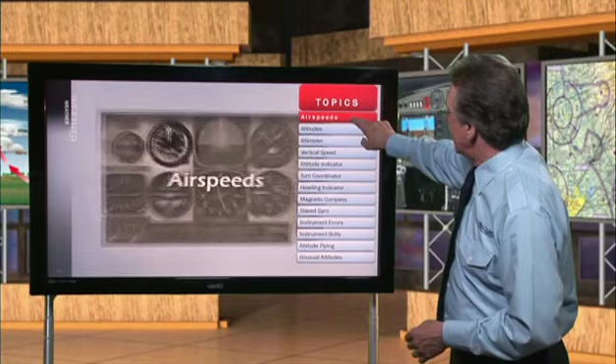We'll cover these topics: airspeeds, altitudes, altimeter, vertical speed, attitude indicator, turn coordinator, heading indicator, magnetic compass, slave gyro, instrument errors, instrument skills, attitude flying, and unusual attitudes. Okay, let's move into the classroom with our first topic, airspeeds. Join your instructor now.

Hi, I'm Robert Bremer, your instructor for this lesson on flight instruments. Flight instruments are the key component of IFR flight. In fact, flight in IMC would be impossible without these instruments. The first instrument we'll discuss is the airspeed indicator. It's part of the pitot-static system, which we'll discuss in greater detail later.

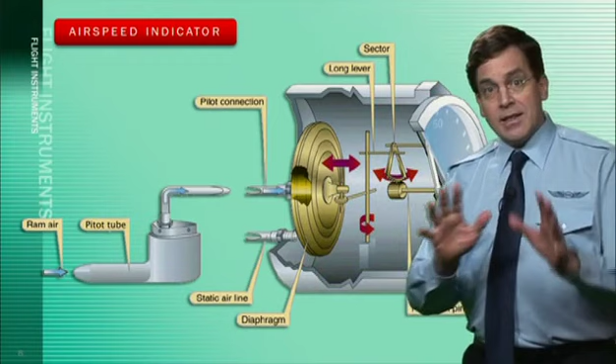Here we have a simplified diagram of the pitot-static system to which the airspeed indicator is connected. The airspeed indicator is connected directly to the pitot tube. So let's take a look at the inner workings of an airspeed indicator. The ram air enters the pitot tube and pressurizes this diaphragm. The diaphragm drives the airspeed indicator hands through a mechanical coupling consisting of a long lever and this sector gear.

So let's take a look at some common types of airspeed indicators found in general aviation airplanes. First is a true airspeed indicator, like the one you see here. A true airspeed indicator allows the pilot to correct indicated airspeed for non-standard temperature and pressure. Next is a maximum allowable airspeed indicator with a movable pointer indicating the never-exceed speed, which changes with altitude. And finally, we have a Mach meter, which shows the ratio of the speed of sound to the true airspeed the aircraft is flying.

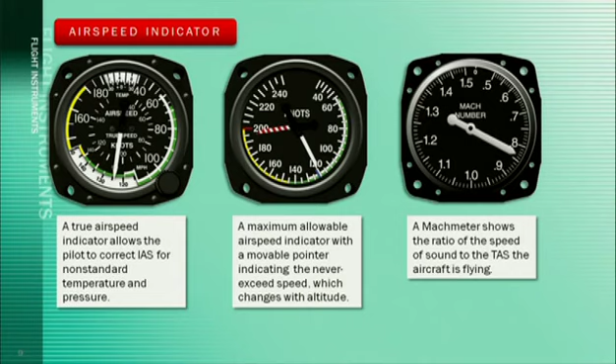So let's take a look at some definitions of a typical airspeed indicator. We'll take a closer look at the color coding. You'll notice there's a series of color-coded arcs on the airspeed indicator: a white arc, green, yellow, and then this red line right here. These are airspeed limitation ranges or operating limits of your airplane. Depending upon what airplane you fly, the arcs may shift to different airspeeds, but you'll see these colored arcs on each and every airplane you fly.

Indicated airspeed is that speed read directly from the airspeed indicator. Now, airspeed that is corrected for installation and instrument error is called calibrated airspeed. True airspeed is calibrated airspeed corrected for variations in temperature and pressure. And finally, the Mach number is that ratio of true airspeed to the speed of sound. Let's study airspeed limitations: the white arc, which you see right here, represents the flap operating range.

At the bottom of the white arc, or at the lower speed, is the airspeed limitation called VSO. The V stands for velocity, or speed, and the S stands for stalling, and the O stands for a certain configuration. In this case, that configuration is the lowest possible airspeed you can have with the flaps and landing gear down, or in the landing configuration. Below this airspeed, in the landing configuration, the airplane will stall.

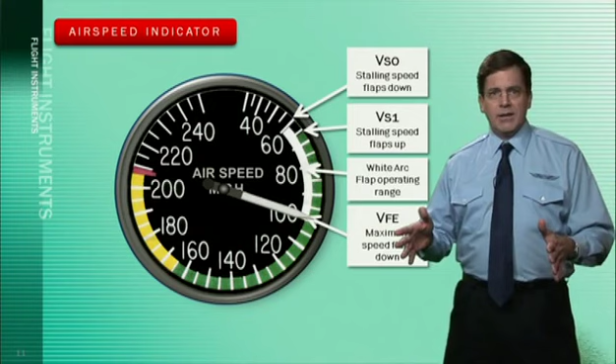We also have this green arc, and the green arc represents the normal operating range. At the top of the green arc, at the higher end, we have VNO, and this is really the highest airspeed you should fly under most operating parameters. You can, from time to time, fly into the yellow arc if the air is very smooth. But just like a street light, remember, yellow means caution. If the air is bumpy, you want to reduce your speed to fly in the green arc.

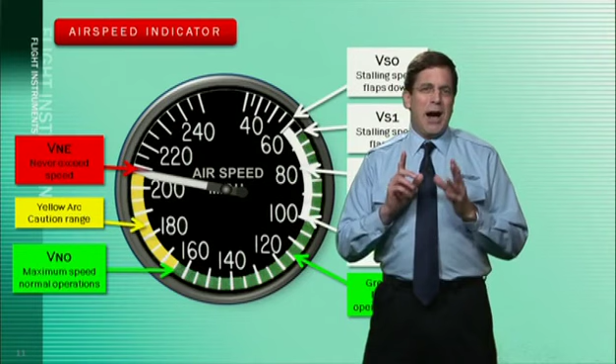Now, like we were saying, the yellow arc represents caution. Operating in this range requires caution, and as mentioned earlier, you should only fly at these speeds in smooth air. At the very top of the yellow arc is the red line, right here. This is VNE: V for velocity, N for never, and E for exceed. Never exceed speeds above this red line can be very dangerous. If you fly above this speed, you risk the likelihood of structural damage to the airplane.

There are also some airspeed limitations that are not marked on the airspeed indicator, but you need to know them just the same.

VA is maneuvering speed. Maneuvering speed is that speed at which you may move the flight controls to their maximum fore and aft deflection and not produce any structural damage to the airplane. VA, or maneuvering speed, can be found in the pilot's operating handbook for the particular airplane that you're flying.

Another airspeed limitation not depicted on the airspeed indicator is VLE. VLE is the maximum landing gear extension speed. This is the maximum speed at which you can safely lower the landing gear if you have aircraft with retractable landing gear. Again, this speed is found in the pilot's operating handbook.

Now, next is VX speed. VX is the best angle of climb speed. And VY is the best rate of climb speed.

Let's take a look at an example. Now here our airplane is rolling for departure, but you'll notice there's a group of trees at the end of the runway. If you have an obstruction at the end of the runway, you need to make sure you can climb out at VX, the best angle of climb speed. This airspeed allows the airplane to gain the greatest amount of altitude in a given distance.

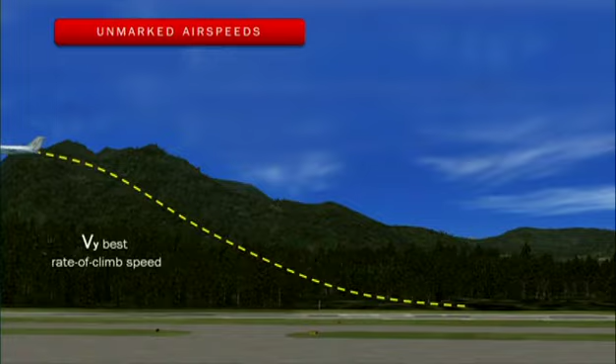And we're at altitudes. Back into your classroom to join your instructor. Our flight altitudes are an important aspect in both VFR and IFR operation. Aviators define altitudes based on a number of factors determined by both physical properties and regulations. In this section, we'll study types of altitudes.

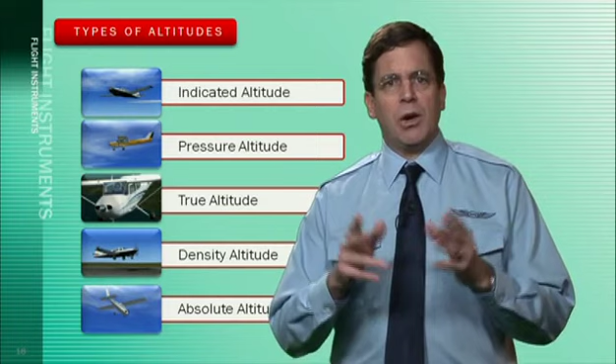Let's talk about the various types of altitudes. Now here's an overview of the various altitudes you need to know. There is indicated altitude, and then we have pressure altitude, followed by true altitude, density altitude, and finally absolute altitude. Let's cover these in greater detail. We'll start with indicated altitude. Indicated altitude is simply the altitude that's shown on the face of your altimeter.

Remember this: atmospheric pressure decreases an inch for every 1,000 foot altitude increase. So if our altimeter is set to 29.15 inches and a new altimeter setting of 29.85 inches is entered, representing a change of 0.7 of an inch, this equals a change in altitude of 700 feet.

Now here's a review of pressure effects. Suppose we're flying along and our altimeter is set to 29.92 inches. We get a call from the tower, or we talk to FlightWatch, and they say our altimeter setting should be 28.92. That's a decrease of 1 inch of mercury, so we have a change in altitude of 1,000 feet.

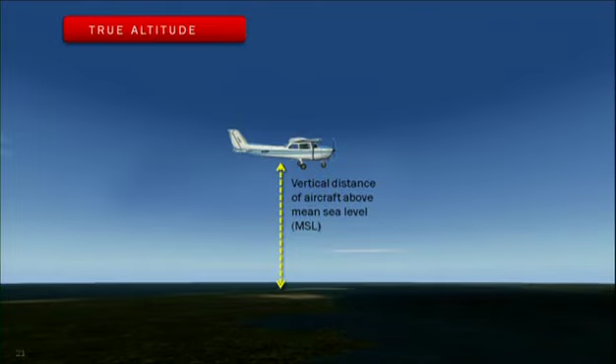Next, let's take a look at true altitude. True altitude is the vertical distance of the airplane above mean sea level, or MSL. Airports, terrain, and obstacle elevations on aeronautical charts are true altitudes.

Density altitude is pressure altitude corrected for non-standard temperature, which is 59 degrees Fahrenheit. Since you'll often be flying in non-standard conditions, you need to know and understand density altitude and how it affects your airplane's performance.

Absolute altitude is the vertical distance of your airplane above ground level, or AGL.

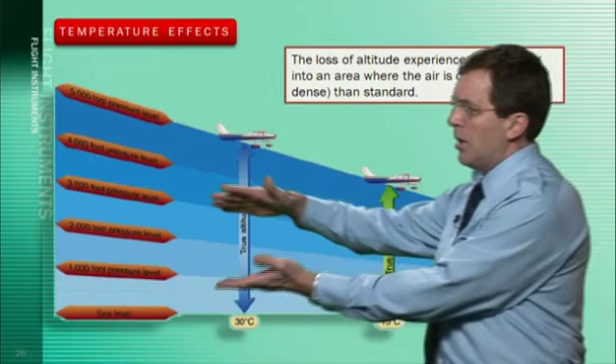When the aircraft is flying in air that is warmer than standard, the air is less dense and the pressure levels are further apart. When the aircraft is flying at an indicated altitude of 5,000 feet, the pressure level for that altitude is higher than it would be in air at standard temperature, and the aircraft is also higher than it would be if the air were cooler. If the air is colder than standard, it is denser, and the pressure levels are closer together. True altitude is higher than indicated altitude whenever the temperature is warmer than ISA.

Now in this example, let's assume we are flying in temperatures outside of ISA parameters. Here we're flying with an indicated altitude of 10,000 feet. The local pressure remains at the standard condition of 29.92 inches. We're flying in warmer than standard air. Because the air is less dense and the pressure levels are further apart, the altimeter reads 10,000 feet, but the true altitude is 11,000 feet.

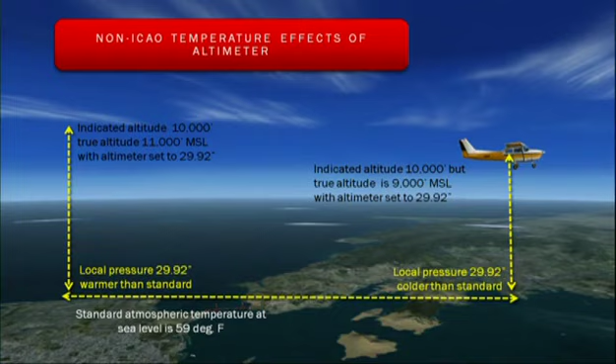Next, we fly into an area where the temperature is colder than standard. Because the air is denser and the pressure levels are closer together, the altimeter reads 10,000 feet, but the true altitude is 9,000 feet. Now we have a table to look at.

This table that you see here is derived from International Civil Aviation Organization, or ICAO, data. The cold temperature-induced altimeter error may be significant when considering obstacle clearances when temperatures are well below standard. You may want to increase your minimum terrain clearance altitudes, with a corresponding increase in ceiling from the normal minimum, when flying in extreme cold temperature conditions.

Now, if compensation is applied, ATC must be informed that the aircraft is not flying the assigned altitude. Otherwise, vertical separation from other aircraft could be reduced, creating a potentially very hazardous situation.

Under extremely cold conditions, pilots may need to add an appropriate temperature correction, determined from the chart, to charted IFR altitudes to ensure terrain and obstacle clearance, with the following restrictions: altitudes specifically assigned by Air Traffic Control, or ATC, such as maintain 5,000 feet, shall not be corrected.

Contact 5 miles east of McMinnville, Portland, altimeter 3019er. 3019er, thank you, 9 Golf Romeo. Welcome, verify your altitude again please. We're just coming up on 4,000, 9 Golf Romeo.

Thank you. Assigned altitudes may be rejected if the pilot decides that low temperatures pose a risk of inadequate terrain or obstacle clearance. As a pilot, you must advise ATC of any applied corrections.

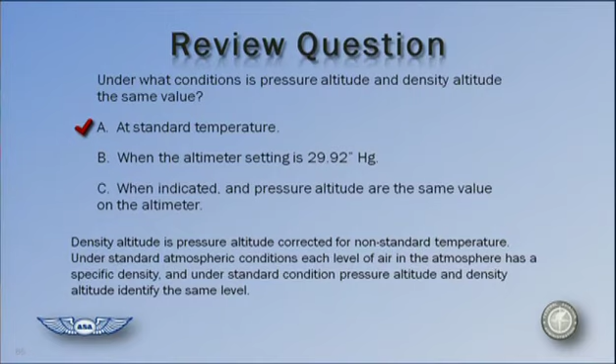Your answer, of course, is A. Density altitude is pressure altitude corrected for non-standard temperature. Under standard atmospheric conditions, each level of air in the atmosphere has a specific density, and under standard condition, pressure altitude and density altitude identify the same level.

Okay, let's take that second question. Under what condition will true altitude be lower than indicated altitude with an altimeter setting of 29.92 inches of mercury? Which of these, A, B, or C?

The correct answer here is B, in colder than standard air temperature. Effects of non-standard conditions can result in a difference of as much as 2,000 feet between true and indicated altitude on a cold day. So there you have it.

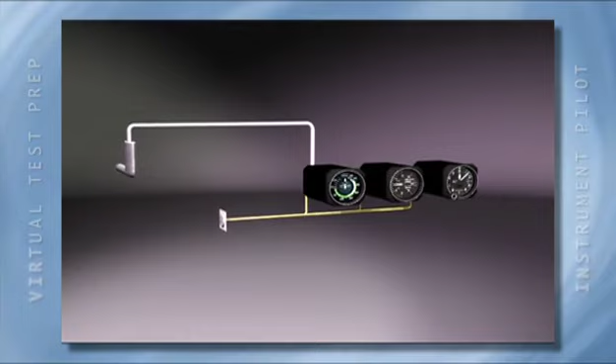The altimeter is part of the pitot-static system. The altimeter shows your height above mean sea level. There are a number of hands on the altimeter, which we'll explain in a moment. Here's an inside view of the altimeter.

The static port, which we see right over here, provides ambient pressure, or the static pressure next to the airplane, for the altimeter. Right here, the aneroid acts like a bellows. It's mechanically coupled to the altimeter pointers.

The pointers generally contain a 100, 1,000, and 10,000 foot hand, and there's a barometric scale adjustment knob which adjusts the altimeter setting in the Kollsman window. The crosshatch flag that you see right down here warns the pilot of low altitudes.

Now, here are two typical altimeters, the three-pointer style and the drum-type altimeter. Each provides the same information. The drum-type altimeter is most often found on larger and more complex airplanes.

Let's take a closer look at the altimeter. This little cut right here is called the Kollsman window, and it displays the altimeter setting. For example, if you departed from a controlled airport that has either a tower, ASOS, or ATIS information, you dial the altimeter setting in right here using this little knob.

If you're departing from an airport that does not have these services, you turn the dial to the field elevation from which you are departing. This will give you a fairly accurate barometric pressure indication.

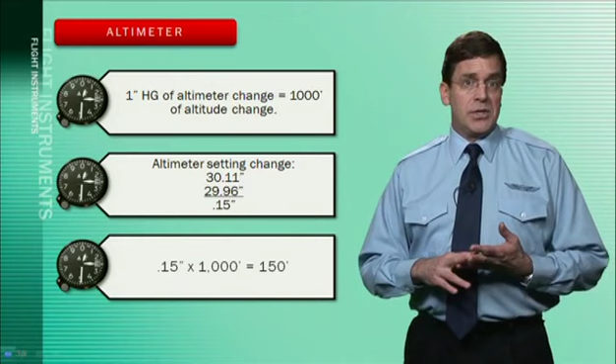Now, check out this graphic. Remember, 1 inch of altimeter change equals 1,000 feet of altitude change. In this example, the altimeter setting is changed from 30.11 to 29.96, which is a change of 0.15. So the altitude change is 0.15 times 1,000 feet equals 150 feet.

We are extremely pleased to have Steve Casner in the studio with us today. Dr. Casner is a research scientist at NASA Ames Research Center in California. He has an airline transport pilot certificate with type ratings in the Boeing 737 and the Cessna Citation. He is also a Gold Seal certified flight instructor. For the past 15 years, Steve has been involved in researching the way pilots learn to use advanced cockpit systems, such as GPS, moving maps, and autopilots, and how these systems can affect pilot awareness, workload, and the types of errors that pilots make.

Steve, we appreciate you being with us. Oh, thanks. Good to be here.

Now, number one question. Many of today's pilots are transitioning from steam gauge instrumentation to the glass cockpit. How is flight training evolving as a result of that? Well, I think there's two schools of thought here. One school believes we should be teaching pilots to use these systems that we're now seeing in the cockpit and to put their trust in them.

Another school believes we should be teaching those systems in addition to all of the old navigational skills that pilots learned in yesteryear: time, distance, rate calculations, fuel calculations, and whatnot. So depending on your frame of mind, some people believe flight training is getting simpler and some people believe it's getting more complex.

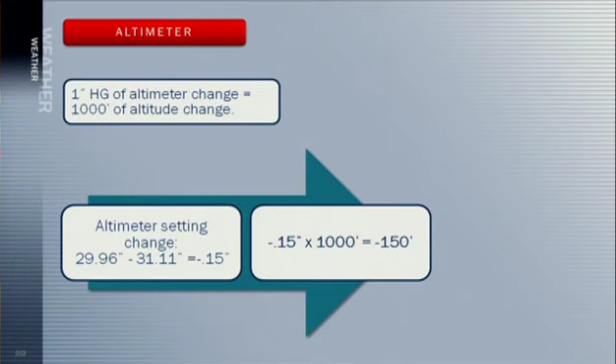Well, in order to get there, we have to do a little math. Given that 1 inch of mercury of altimeter change equals 1,000 feet of altitude change, if we do our math on the altimeter setting change, we take 30.11 inches away from 29.96 inches, we arrive at negative 0.15 inches. We multiply that times our 1,000 feet of altitude change, we get negative 150 feet. We go back to our question, and our correct answer is B: the altimeter will indicate 150 feet lower.

All right, let's move along to the second one. En route at flight level 290, the altimeter is set correctly but not reset to the local altimeter setting of 30.57 inches of mercury during descent. If the field elevation is 650 feet and the altimeter is functioning properly, what is the approximate indication upon landing? Okay, which of these three? I'm going to have to do some more math.

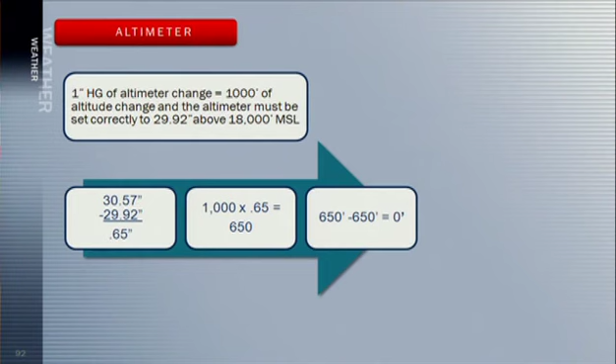Given 1 inch of mercury of altimeter change equals 1,000 feet of altitude change, and given the altimeter must be set correctly to 29.92 inches above 18,000 feet MSL, if we do our math, we take 29.92 inches away from 30.57 inches, we come up with 0.65 inches. Multiply that by 1,000 feet, we get 650 feet. Our field elevation of 650, we take that away from it, so our answer is C, sea level. Given the fact that the altimeter was not set to the field elevation pressure, the altimeter will read sea level or 0 feet.

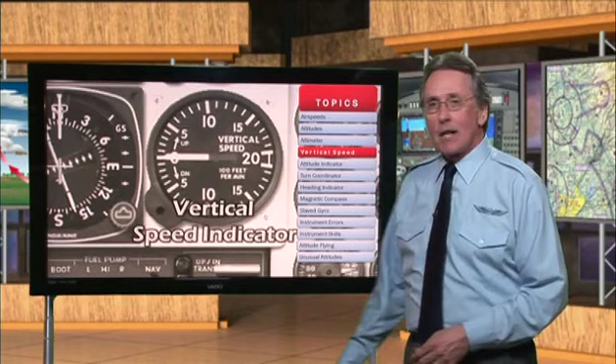Okay, moving on to another topic. Vertical speed is the topic. We'll go back to your classroom and your instructor.

Next up is the VSI, or vertical speed indicator. It's also called a vertical velocity indicator, or VVI, and was formerly known as a rate of climb indicator. It's a rate of pressure change instrument that gives an indication of any deviation from a constant pressure level.

The vertical speed indicator, or VSI, is also part of the pitot-static system. It's connected to the static side of the system. The VSI, formerly known as a rate of climb indicator, is a rate of pressure change instrument that gives an indication of any deviation from a constant pressure level.

The vertical speed indicator measures the rate of climb or descent in hundreds of feet per minute: 500, 1,000, 1,500, or minus 500, minus 1,000, minus 1,500, and so on. Although not required by regulation to be on board, the VSI is commonly found on instrument-equipped airplanes.

To pre-flight the VSI, you would check to make sure that there's a 0 reading prior to takeoff. If it's indicating a climb or descent, you would note the error and apply it to the readings in flight.

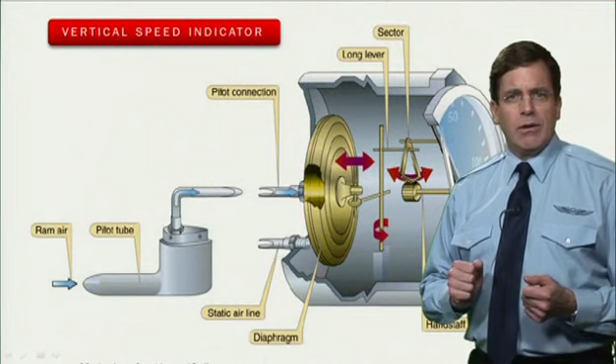The VSI, or rate of climb indicator, is a very sensitive altimeter with a calibrated leak in the case. Inside the instrument case is an aneroid very much like the one you would have in an airspeed indicator. Now, both the inside of this aneroid and the inside of the instrument case are vented to the static system. But the case is vented through a calibrated orifice that causes the pressure inside the case to change more slowly than the pressure inside the aneroid.

It uses the static source as the sensor. As the aircraft ascends, the static pressure decreases. The pressure inside the case compresses the aneroid, moving the pointer upward, showing a climb and indicating the rate of ascent in number of feet per minute, or FPM.

When the aircraft levels off, the pressure no longer changes. The pressure inside the case becomes equal to that inside the aneroid, and the pointer returns to the horizontal or 0 position. When the aircraft descends, the static pressure increases and the aneroid expands. This moves the pointer downward, indicating a descent.

The pointer indication in a VSI lags a few seconds behind the actual change in pressure. However, it's more sensitive than an altimeter, so it's useful in alerting the pilot if an upward or downward trend is going on, thereby helping to maintain a constant altitude.

Welcome back. Let's take on another review question for you. You check the flight instruments while taxiing and find that the vertical speed indicator, or VSI, indicates a descent of 100 feet per minute. In this case, you would take which of these actions, A, B, or C?

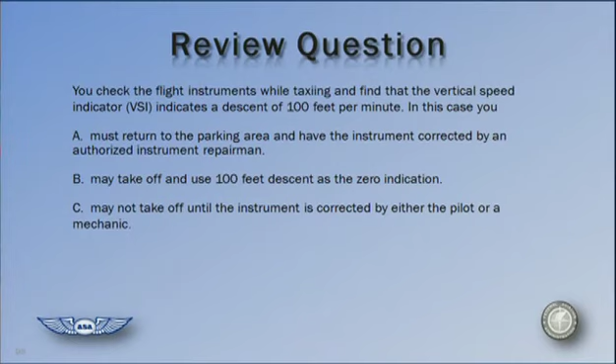And your answer? B. The VSI should indicate 0 plus or minus 100 feet on the ground. Okay, moving along to another topic.

This time out, attitude indicator. We ask you to join your instructor in the class.

Flight without reference to a visible horizon can be safely accomplished by the use of gyroscopic instrument systems and the two characteristics of gyroscopes, which are rigidity and precession. These systems include attitude, heading, and rate instruments along with their power sources. These instruments include the attitude indicator, turn coordinator, and the heading indicator.

A gyroscope, or gyro, is a small wheel with its weight concentrated around the periphery. When this wheel is spun at very high speeds, it becomes rigid and resists tilting or turning in any direction other than around its spin axis.

It takes on a property called rigidity in space. Because of this effect, the gyro does not tip but stays upright. When the gyroscope is mounted inside a gimbal device, that gimbal mechanism is moved around its three axis points. The gyro will still stay rigid.

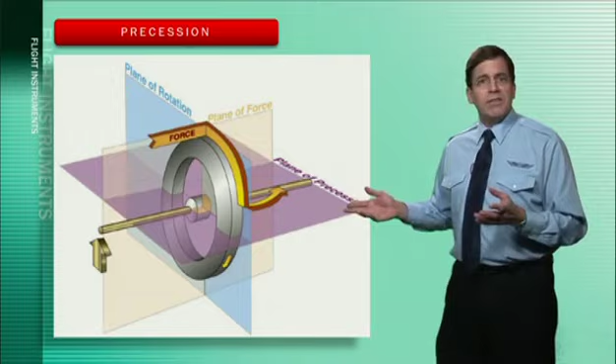Here is a spinning gyro. As force is applied to this point right here with the red dot, the force advances 90 degrees, and that's where it's applied. This causes the gyro to tilt in that direction.

Pneumatic gyros are driven by a jet of air impinging on buckets that are cut into the periphery of the wheel, as shown on this turn and slip indicator. On many aircraft, this stream of air is obtained by evacuating the instrument case with a vacuum source and allowing filtered air to flow into the case through a nozzle to spin the wheel.

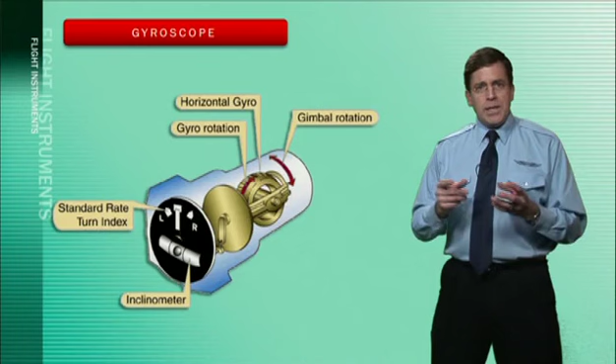The two attitude instruments operate on approximately 4 inches of mercury of suction. The turn and slip indicator, however, only needs 2 inches of mercury, so a pressure reducing needle valve is used to decrease the suction. Air flows into the instruments through filters built into the instrument cases. Now in this system here, we have a problem: ice can clog the Venturi tube and stop the instruments when they're most needed.

So here's a typical vacuum pump system. This vacuum pump pulls air into and out of the gyro instruments, and is driven by the engine of the airplane. The air is pulled through a filter, comes out of the filter, and moves into the heading and attitude indicators. The air flows through the instruments and is evacuated through a regulator, which maintains a constant rate of vacuum pressure moving into and through these instruments.

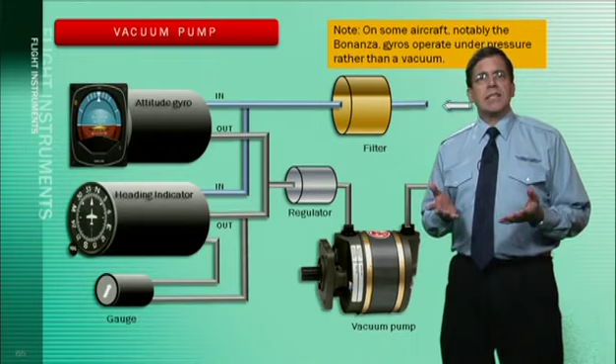What we see here is the business end of our attitude indicator, or artificial horizon. This is the face of the instrument. We have a miniature airplane, and it has wings, indicating along this horizon. You can adjust the airplane up and down on the horizon with this little knob. Turning the knob allows you to align the miniature airplane with the horizon in the instrument.

A pre-takeoff check verifies that the horizon bar stabilizes within 5 minutes and does not dip more than 5 degrees during taxiing turns. These marks up here indicate bank angle from 0 degrees all the way over to a full 90 degrees of bank. Now, that's the attitude indicator, or artificial horizon.

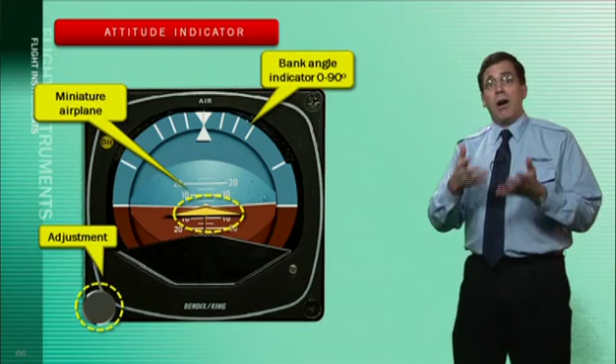The attitude indicator provides an immediate, direct, and corresponding indication of any change of aircraft pitch and bank attitude. This pitch and bank depiction is in relation to the natural horizon. It's the pilot's primary instrument during transitions of pitch.

The attitude indicator is subject to some errors that you need to know about. Following a 180-degree turn, it indicates a slight climb and bank in the opposite direction. That's called turn error. Now, following a 360-degree turn, this error cancels itself out and it's not apparent.

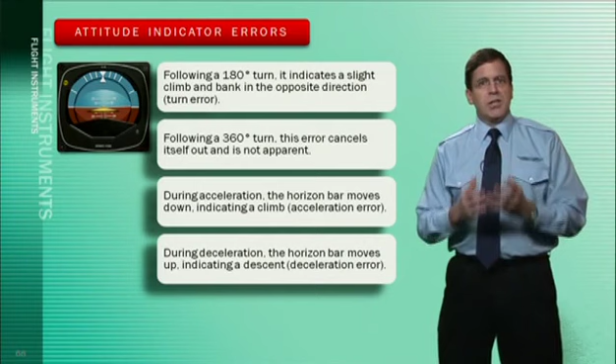Also, during acceleration, the horizon bar moves down, indicating a climb. This is acceleration error. During deceleration, the horizon bar moves up, indicating a descent. That's deceleration error. Now let's take a look at some examples.

Okay, let's take care of a couple of review questions for you. During normal operation of a vacuum-driven attitude indicator, what attitude indication should you see when rolling out from a 180-degree skidding turn to straight and level coordinated flight? Which of these is correct?

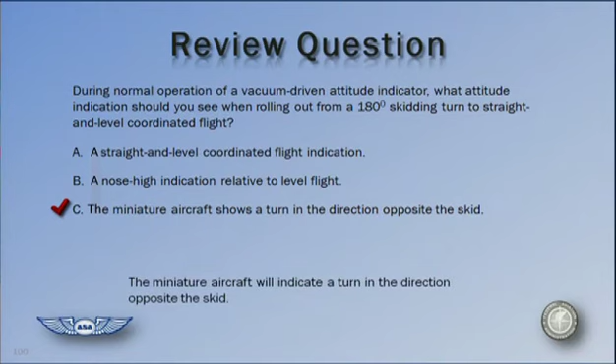Our answer is C. The miniature aircraft will indicate a turn in the direction opposite the skid.

Another topic. This one, turn coordinator. Back to your classroom.

The next instrument that uses a gyroscope is the turn indicator. Before we discuss the turn coordinator instrument in detail, it's a good time to review the turning forces. Remember, an airplane turns because of the horizontal component of lift. The greater the horizontal lift, the greater the rate of turn.

In a turn, the angle of attack must be increased to maintain altitude. With reduced airspeed, you would decrease the bank angle or increase the angle of attack to maintain level flight. In a constant bank, airspeed increase results in a decrease in turn rate and an increase in radius.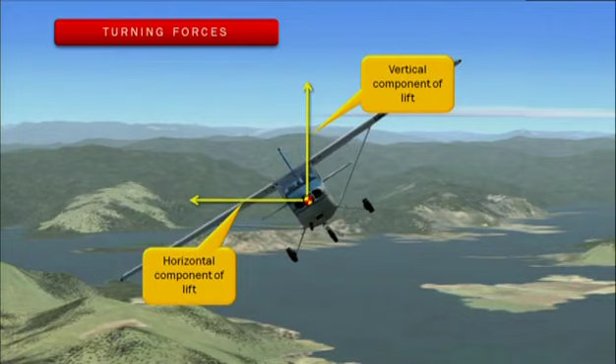Check this animation. As the airplane enters the turn, a number of force vectors are created. There's the vertical component of lift, the horizontal component of lift, followed by the centrifugal component of lift. These forces combine to create the resultant lift vector. Finally, remember that the load factor is the ratio between the resultant lift and the aircraft's weight.

Here's a cutaway view of a typical turn coordinator. Note the canted gyro and rotation, the gimbal, and the face of the turn coordinator. A turn coordinator operates on precession, the same as the turn indicator, but its gimbal frame is angled upward about 30 degrees from the longitudinal axis of the aircraft. This allows it to sense both roll and yaw.

Therefore, during a turn, the indicator first shows the rate of banking and once stabilized, the rate of turn. The bezel of the instrument is marked to show wings level flight and bank angles for a standard rate turn. It's gyroscopically operated, designed to show roll rate, rate of turn, and quality of turn. It acts as a backup system for the vacuum-powered attitude indicator.

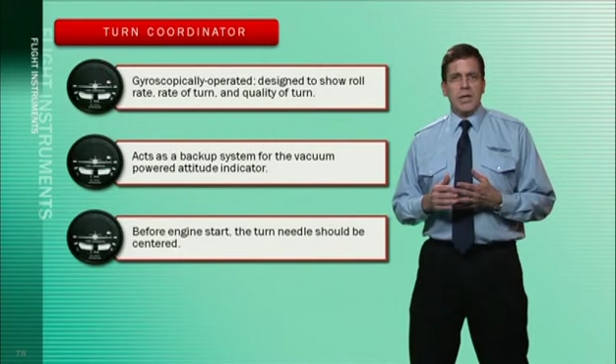Before engine start, the turn needle should be centered. During a taxiing turn, the needle indicates a turn in the proper direction and the ball shows a skid. The turn coordinator provides both yaw and bank information.

The little miniature airplane provides only an indirect indication of roll, responding with the airplane's banking action in some cases even before the turn can actually commence. However, in this case, the ratio of the turn is not 1-to-1 with the horizon like it is on the attitude indicator. This means that in a 30-degree bank turn, the miniature airplane will show a bank on the turn coordinator, but it may not show up as a 30-degree bank.

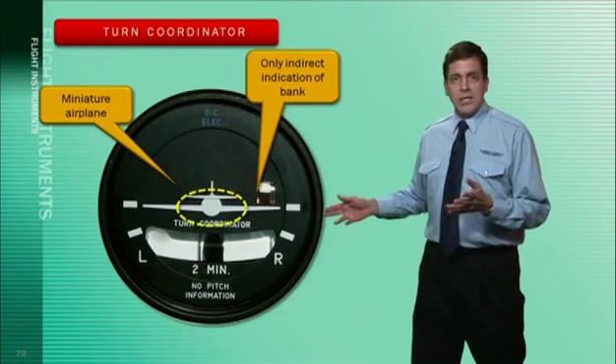At the bottom of the instrument is a little fluid-filled tube and ball. A turn coordinator does not sense pitch. This is indicated on some instruments by placing the words 'no pitch information' on the dial.

Now the inclinometer down here is called a coordination ball, which shows the relationship between the bank angle and the rate of yaw. In a coordinated turn, horizontal lift and centrifugal force are equal.

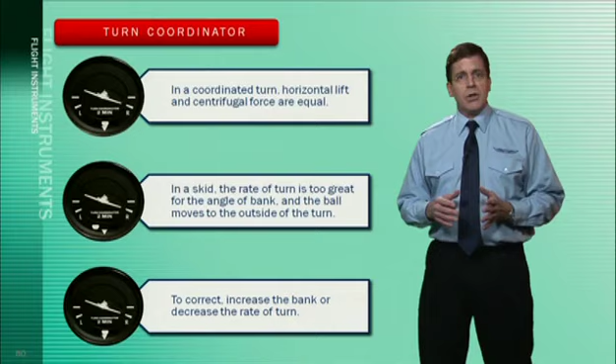In a skid, the rate of turn is too great for the angle of bank and the ball moves to the outside of the turn. To correct this condition, increase the bank or decrease the rate of turn. The turn is coordinated when the ball is in the center, between the marks. The aircraft is skidding when the ball rolls toward the outside of the turn and is slipping when it moves towards the inside of the turn.

Now, a standard rate of turn is 3 degrees per second. It takes 1 minute to complete a 180-degree turn. A half standard rate turn is 1.5 degrees per second. That takes 4 minutes to complete a 360-degree turn, or it takes 60 seconds to complete a 90-degree turn.

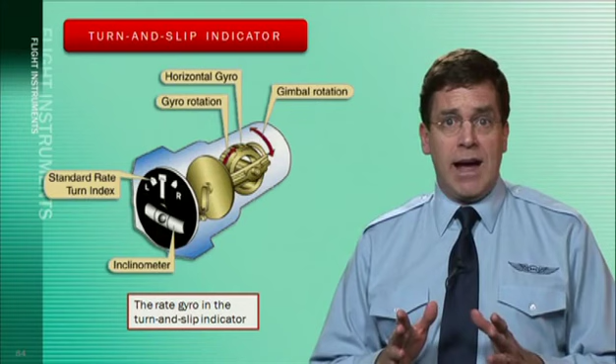The turn and slip indicator is a small gyro spun either by air or by an electrical motor. Note the horizontal gyro, gyro rotation, gimbal rotation, the standard rate turn index, and the inclinometer. The gyro is mounted in a single gimbal with its spin axis parallel to the lateral axis of the aircraft and the axis of the gimbal parallel with the longitudinal axis. The turn and slip indicator indicates yaw, but not roll.

Okay, this is a good time to review with a couple of questions what you just learned. If a standard rate turn is maintained, how long would it take to turn 180 degrees? Which of these is true and correct, A, B, or C? The answer is A. 3 degrees per second times 60 seconds equals 180 degrees.

All right, question number 2. What indication is presented by the miniature aircraft of the turn coordinator? Which of these is correct? Your answer? A. The miniature aircraft depicts an indirect indication of the bank attitude.

Okay, selecting a new topic.

We're down to the heading indicator, and we're back in your classroom for that topic. Next up, the heading indicator.

The heading indicator is the final gyroscopic instrument. It basically provides the same information as the magnetic compass, but in a much better way. It does, however, require that it be set to match the magnetic compass.

Here we go. The last gyro instrument is the heading indicator. It looks very similar to a compass. The heading indicator shows the direction the nose of the airplane is heading. In this case, we're heading 341 degrees. The heading indicator is much easier to read than a magnetic compass, using a heading adjustment knob.

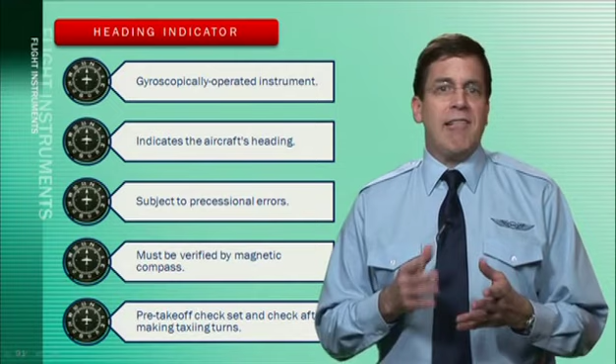Okay, back into the studio for a review question. What pre-takeoff check should be made of a vacuum-driven heading indicator in preparation for an IFR flight? Which of these is your correct answer?

And our answer is A: after 5 minutes, set the indicator to the magnetic heading of the aircraft and check for proper alignment after taxi turns. Very good. Moving along, yet another topic.

We are down to the magnetic compass. We ask you to join your instructor in the classroom. The last instrument we're going to study is the magnetic compass. The magnetic compass is not a pressure-driven or gyro-powered instrument, but it is perhaps the most important instrument there is. You have to know where you're going.

The magnetic compass does, however, suffer from error tendencies. As you know, the Earth has geographic and magnetic poles. Lines of magnetic force stretch between the north and south magnetic pole. These lines of force are sensed by the magnetic compass, which points towards magnetic north. All general aviation aircraft are equipped with a magnetic compass.

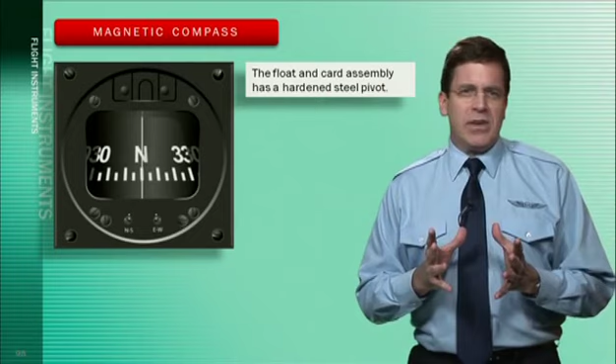The float and card assembly has a hardened steel pivot in its center that rides inside a special spring-loaded hard glass jewel cup. The buoyancy of the float takes most of the weight off the pivot, and the fluid damps the oscillation of the float and card. This jewel and pivot type mounting allows the float freedom to rotate and tilt up to approximately 18 degrees angle of bank. At steeper bank angles, the compass indications are erratic and unpredictable.

The compass housing is entirely full of compass fluid. To prevent damage or leakage when the fluid expands and contracts with temperature changes, the rear of the compass case is sealed with a flexible diaphragm or, in some compasses, a metal bellows. The magnets align with the Earth's magnetic field, and the pilot reads the direction on the scale opposite the lubber line, which is this vertical line right here.

A compensator assembly mounted on the top or bottom of the compass allows an aviation maintenance technician, or AMT, to create a magnetic field inside the compass housing that cancels the influence of local outside magnetic fields. This is done to correct for deviation error.

The compensator assembly has two shafts with ends that have screwdriver slots accessible from the front of the compass. Each shaft rotates one or two small compensating magnets. One shaft is marked EW, and its magnets affect the compass when the aircraft is pointed east or west. The other shaft is marked NS, affecting the compass when the aircraft is pointed north or south. Now, next up are compass errors.

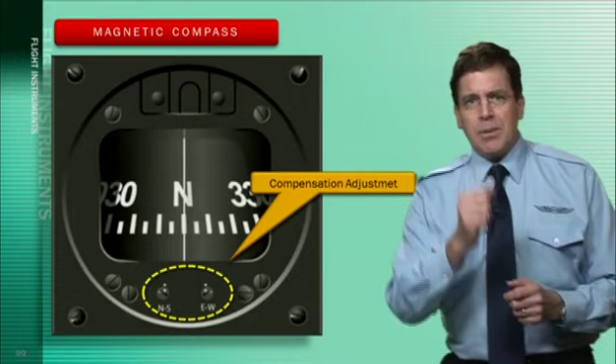Let's start with acceleration errors. First, assume you're in the northern hemisphere and the airplane is on an east to west heading. The compass will swing to the north while you accelerate and then return to the correct heading. If the aircraft accelerates on a heading of east, the inertia of the weight holds its end of the float back, and the card rotates towards the north.

As soon as the speed of the aircraft stabilizes, the card swings back to the east indication. If, while flying on this easterly heading, the aircraft decelerates, the inertia causes the weight to move ahead and the card rotates towards south until the speed again stabilizes.

When flying on a heading of west, the same things happen. Inertia from acceleration causes the weight to lag and the card rotates towards the north. When the aircraft decelerates on a heading of west, inertia causes the weight to move ahead and the card rotates towards south. If you're decelerating on the same east to west heading, the compass swings to the south and then returns to the correct heading after deceleration.

So there's an acronym for this. Remember this, ANDS, A-N-D-S, which stands for accelerate to the north, decelerate to the south. It occurs only on easterly or westerly headings. The compass will indicate correctly when accelerating on north or south headings.

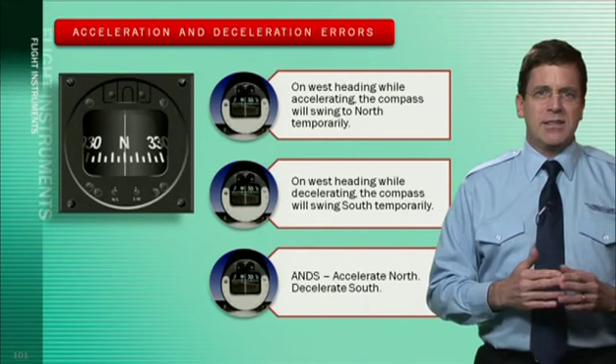Next, there are turning errors. The lines of magnetic flux leave the Earth at the magnetic North Pole and enter at the magnetic South Pole. At both locations, the lines are perpendicular to the Earth's surface. At the magnetic equator, the lines are parallel with the surface. The magnets in a compass align with this field.

And near the poles, they dip or tilt, tilting the float in the card. The float is balanced with a small dip compensating weight, so it stays relatively level when operating in the middle latitudes of the northern hemisphere. This dip along with this weight causes two very noticeable errors: northerly turning error and acceleration error.

The pull of the vertical component of the Earth's magnetic field causes northerly turning error, which is apparent on a heading of north or south. When an aircraft flying on a north heading makes a turn toward east, the aircraft banks to the right. This causes the compass card to tilt to the right. The vertical component of the Earth's magnetic field pulls the north-seeking end of the magnet to the right, and the float rotates, causing the card to rotate toward west, the direction opposite the direction the turn is being made.

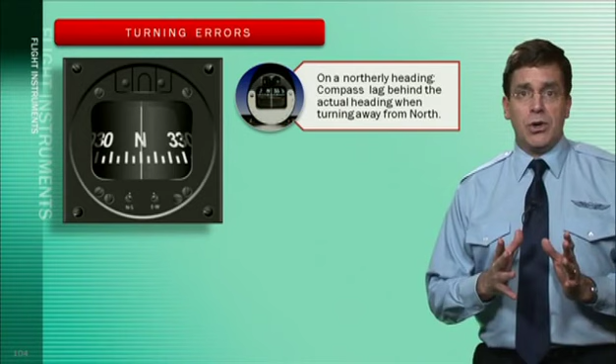This northerly turning error is based on the aircraft heading north. The compass will want to remain pointing north towards the North Pole when turning away from a northerly heading. The compass will lag or possibly even indicate a turn in the opposite direction during the first part of the turn. When you reach an east or west heading, it catches up and reads correctly.

But as you continue with a turn to the south, the compass starts to race ahead of that turn. In fact, to roll out on a south heading, you have to turn past the heading on the compass, overshooting a bit to the south.

So there's an acronym for this. Just remember OSUN, which stands for overshoot south, undershoot north. In the mid-latitudes, maybe as much as 30 degrees is reasonable for overshoot or undershoot when turning to the north or south heading. Again, to summarize, when turning to the south, the compass indication will lead. When turning to the north, the compass indication lags.

Deviation is the compass error caused by magnetic disturbances from electrical and metal components in the aircraft. The correction for this error is displayed on a compass correction card placed near the magnetic compass in the aircraft.

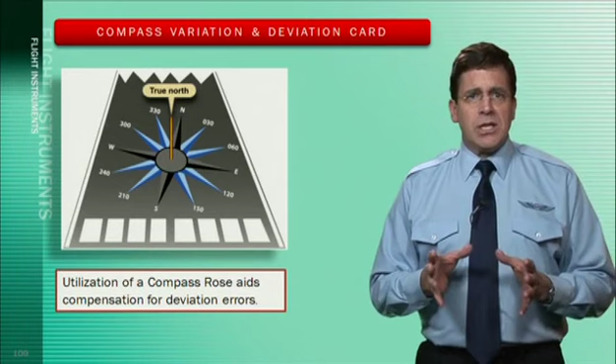Many airports have a compass rose painted on a specific place on the airport's surface, allowing for compensation of deviation errors. A compass correction card prepared by the pilot operator provides heading correction caused by variation and or deviation, and it could look like this here.

The vertical card magnetic compass, which we see right here, is an improvement over the fluid-filled magnetic compass. The floating magnet type of compass not only has all the errors just described, but also lends itself to confused reading. It's easy to begin a turn in the wrong direction because its card appears backward.

Not so with the vertical compass. The vertical card magnetic compass eliminates some of the errors and confusion. The dial of this compass is graduated with letters representing the cardinal directions, north, east, south, and it's got numbers every 30 degrees and marks every 5 degrees.

The dial is rotated by a set of gears from the shaft-mounted magnet, and the nose of the symbolic airplane on the instrument glass represents the lubber line for reading the heading of the aircraft from the dial. Eddy currents induced into an aluminum damping cup damp any oscillation of the magnet.

Back for another review question. When flying in the northern hemisphere, if an aircraft is accelerated or decelerated, the magnetic compass will normally indicate which of these, A, B, or C?

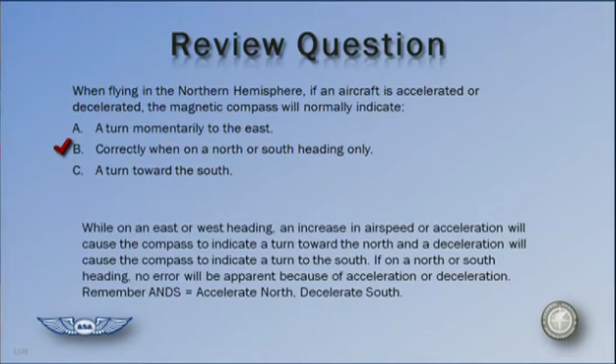Your answer is B. While on an east or west heading, an increase in airspeed or acceleration will cause the compass to indicate a turn toward the north, and a deceleration will cause the compass to indicate a turn toward the south. If on a north or south heading, no error will be apparent because of acceleration or deceleration. Remember, ANDS: accelerate north, decelerate south.

Okay, let's move along to a new topic.

This one, slaved gyro. Back to your instructor in the classroom.

The slaved gyro system was developed to compensate for the errors and limitations of the older type of heading indicators. There are two types of indicators installed in general aviation aircraft. The one on the left, shown here, is an HSI, or horizontal situation indicator. The example shown on the right is an RMI, or radio magnetic indicator. Both indicators are synonymous with a pictorial navigation indicator. The two panel-mounted components of a typical system are the pictorial navigation indicator, the slaving control and compensator unit, and a remote magnetic sensor, also referred to as a flux gate compass sensor.

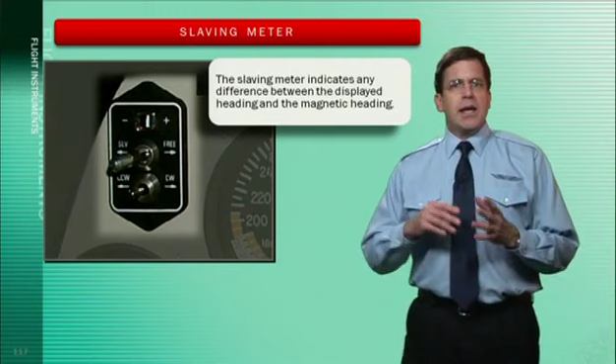The slaving meter indicates any differences between the displayed heading and the magnetic heading. A right deflection indicates a clockwise error of the compass card. A left deflection indicates a counterclockwise error of the compass card. In the free gyro mode, depressing the clockwise manual heading drive button rotates the compass card to the right. Depressing the counterclockwise heading drive button rotates the compass card to the left.

The flux gate compass that drives the slaved gyro uses the characteristic of current induction. The flux valve is a small segmented ring made of soft iron that readily accepts lines of magnetic flux. An electrical coil is wound around each of the three legs to accept the current induced in this ring by the Earth's magnetic field. A coil wound around the iron spacer in the center of the frame has 400 Hertz alternating current, or AC, flowing through it. During the times when this current reaches its peak, twice during each cycle, there is so much magnetism produced by this coil that the frame cannot accept the lines of flux from the Earth's field. But as the current reverses between the peaks, it demagnetizes the frame so it can accept the flux from the Earth's field. As this flux cuts across the windings in the three coils, it causes current to flow in them.

These three coils are connected in such a way that the current flow in them changes as the heading of the aircraft changes. The three coils are connected to three similar but smaller coils in a synchro inside the instrument case. This synchro in turn rotates the dial on the indicator.

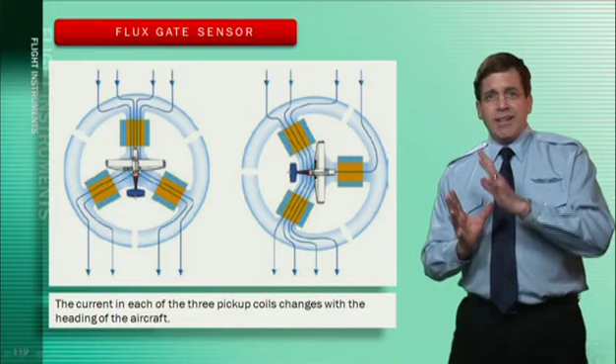Okay, let's take a look at a review question on this topic. When using the slaved gyro system and when the system is in the free gyro mode, depressing the clockwise CW manual heading drive switch will rotate the remote indicating compass card to the A, B, or C.

Your correct answer is A. When the system is in the free gyro mode, depressing the clockwise CW manual heading drive switch will rotate the remote indicating compass card to the right. Okay, there you have it.

All right, let's get to another topic: instrument errors. We take you back to your classroom for a discussion of that topic.

While the flight instruments are generally very reliable, they do sometimes fail. It's therefore very important to understand these potential failures to maximize flight safety. To understand instrument errors, we must first understand the pitot-static system. Pitot pressure, or impact air pressure, is sensed through an open-ended tube pointed directly into the relative wind flowing around the aircraft. This pitot tube connects to pressure-operated flight instruments such as the ASI, or airspeed indicator.

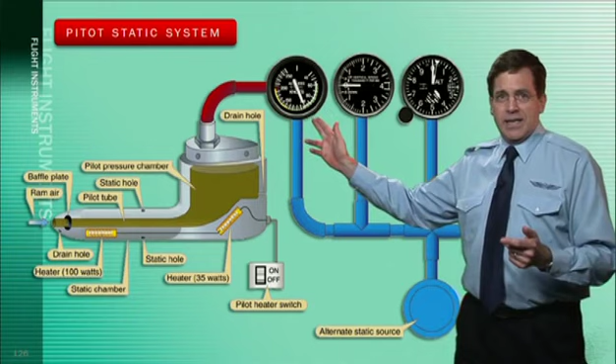Quick summary: a static port is the source of ambient pressure. The pitot tube provides ram pressure for airspeed indications. The vertical speed indicator, or VSI, measures rate of climb and descent. The altimeter measures static air pressure and indicates height above sea level.

Back to instrument errors. Check this table. If the pitot tube becomes blocked, say by a bug, dirt, or debris, you won't get an accurate airspeed indication. Instead, the instrument will read zero. The altimeter and VSI will continue to work properly.

With a blocked pitot and drain hole, and an open static condition, the airspeed indicator will read high in a climb and low in a descent. Again, the altimeter and VSI will function correctly.

If the static source is blocked and the pitot is open, the airspeed indicator will indicate low in a climb and high in a descent. Both the altimeter and VSI will be frozen.

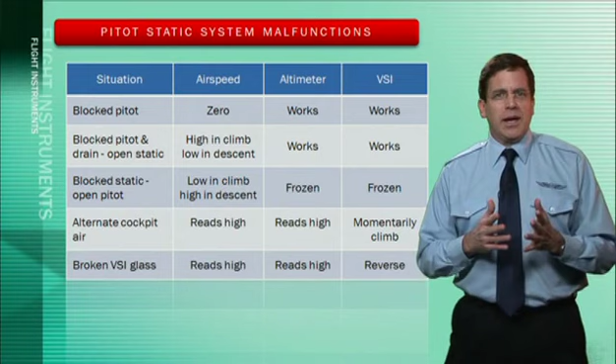When the alternate static source is on, the airspeed and altimeter will read high and the VSI will show a momentary climb. Should the VSI glass be broken, the airspeed and altimeter will read high and the VSI will indicate in the reverse direction.

Let's cover a review question under this topic. If both the ram air input and the drain hole of the pitot system are blocked, what reaction should you observe on the airspeed indicator when power is applied and a climb is initiated out of severe icing conditions? Which of these is correct, A, B, or C?

Your correct answer is C. If both the ram air, or pitot, input and the drain hole of the pitot system are blocked, there will be no change until an actual climb rate is established, then indicated airspeed will increase.

All right, good enough. Let's tackle something new. Our next topic is instrument skills, and we send you back into the classroom for that one.

Instrument flying proficiency is the single most fundamental skill to ensure a safe and enjoyable flight.

Roger, I'm climbing through 2,300 for 5,000, 9 Golf Romeo. November 9 Golf Romeo, that matched up a little bit better. You are radar contact 1 mile northeast of the Aurora State Airport. Turn left direct Newberg on course. Roger, turn left direct Newberg on course, 9 Golf Romeo.

You can have all the best instruments and electronics in your panel, but without these skills, you'll not be able to competently conduct your next flight. During attitude instrument training, the pilot must develop three fundamental skills involved in all instrument flight maneuvers: instrument cross-check, instrument interpretation, and aircraft control.

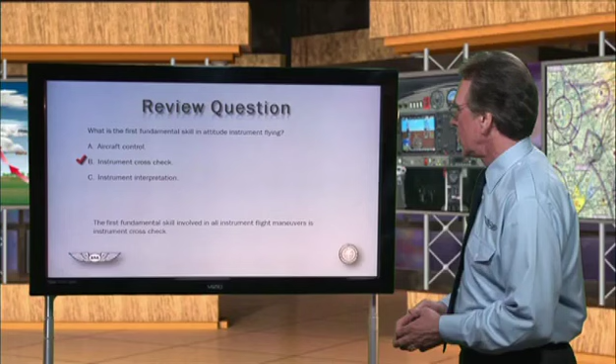Attitude flying. Let's take that one into the classroom for you.

So far, you know that the attitude of an aircraft is controlled by movement around its lateral or pitch, longitudinal or roll, and vertical or yaw axes.

In instrument flying, attitude requirements are determined by correctly interpreting the flight instruments. Instruments are grouped as to how they relate to control, function, and aircraft performance. Attitude control is discussed in terms of pitch, bank, and power control.

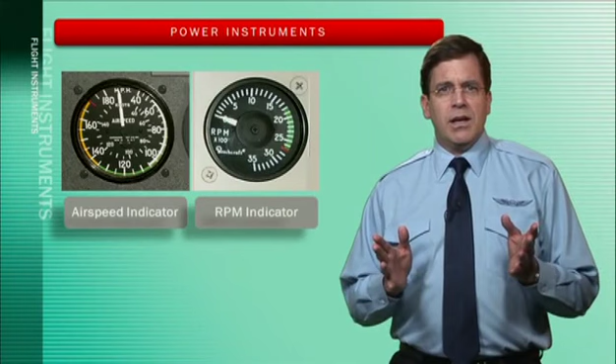The three pitot-static instruments, the three gyroscopic instruments, and the tachometer or manifold pressure gauge are grouped into the following categories. The pitch instruments are the airspeed indicator, the altimeter, the attitude indicator, and the vertical speed indicator. The bank instruments consist of the attitude indicator, the heading indicator, the turn coordinator, and the magnetic compass. The power instruments include the airspeed indicator, the tachometer, and the manifold pressure gauge.

The instruments which provide the best information for controlling the aircraft in any given maneuver are referred to as primary instruments. These are usually the instruments that should be held at a constant indication, which means you look at these first. The remaining supporting instruments should help maintain the primary instruments at the desired indications and be used as backup.

When climbing and descending, it's necessary to begin level off in enough time to avoid overshooting the desired altitude. The amount of lead to level off from a climb varies with the rate of climb and pilot technique. If the aircraft is climbing at 1,000 feet per minute, it will continue to climb at a decreasing rate throughout the transition to level flight.

An effective practice is to lead the altitude by 10% of the vertical speed. 500 feet per minute would have a 50-foot lead. 1,000 feet per minute would have a 100-foot lead.

The amount of lead to level off from a descent also depends upon the rate of descent and the control technique. To level off from a descent at descent airspeed, lead the desired altitude by approximately 10%. For level off at an airspeed higher than descending airspeed, lead the level off by approximately 25%.

When making initial pitch attitude corrections to maintain altitude during straight and level flight, the changes of attitude should be small and smoothly applied. As a rule of thumb, for airplanes, use a half bar width correction for errors of less than 100 feet and a full bar width correction for errors in excess of 100 feet.

In the summary, we have two columns, primary and supporting. Primary for pitch is altimeter, supporting for pitch is attitude indicator and VSI. Primary for bank is the heading indicator, and supporting for bank is the turn coordinator and the attitude indicator. Primary for power is the airspeed indicator, and supporting for power is manifold pressure and RPM.

Okay, here we've got another scenario. We're talking about changing airspeed straight and level pitch instruments. Primary is our altimeter, and our secondary is our vertical speed indicator and our attitude indicator.

In our next scenario, we'll take a look at changing airspeed straight and level bank instruments. Our primary is our heading indicator, and our supporting is going to come from our attitude indicator and our turn and bank coordinator. In a new scenario, we'll take a look at this one that's coming up, and we're going to look at changing airspeed straight and level.

Manifold pressure and RPM are primary for changing airspeed straight and level in our power instruments, and our supporting information comes from our airspeed indicator.

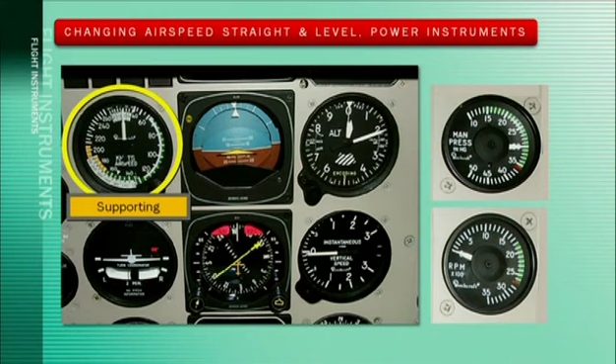Now, take a look at this summary. The changing airspeed straight and level, again we have our two columns, primary and supporting. Primary for pitch is altimeter, and supporting for pitch is attitude indicator and VSI. Primary for bank is our heading indicator, and supporting for bank is our turn coordinator and our attitude indicator. Primary for power is manifold pressure and RPM, and supporting for power is our airspeed indicator.

Our next scenario is add power and enter constant airspeed. Pitch instruments: primary is from our attitude indicator, and supporting information comes from our airspeed indicator and vertical speed indicator. For bank instruments, primary comes from our heading indicator, and support comes from our turn coordinator.

In this scenario, we have add power and enter constant airspeed with power instruments. Primary comes from manifold pressure and RPM, and supporting comes from our airspeed indicator.

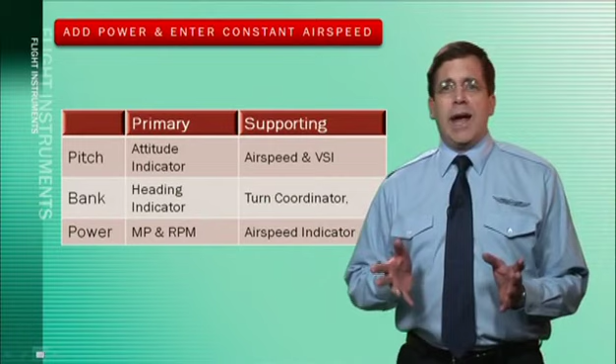Again, we've got a summary for add power and enter constant airspeed, our primary and supporting columns. Primary information comes from pitch from the attitude indicator, and supporting pitch comes from airspeed and VSI. Primary bank comes from our heading indicator, and supporting bank comes from our turn coordinator. Primary power comes from manifold pressure and RPM, and supporting power comes from our airspeed indicator.

In this scenario, we've got stable airspeed, climb and descent pitch instruments. The primary information is going to come from our airspeed indicator. Supporting information is going to come from our vertical speed indicator and from our attitude indicator.

In our next scenario, we're going to take a look at stable airspeed, climb and descent bank instruments. Our primary is going to come from our heading indicator. Our supporting information is going to come from our attitude indicator and from our turn coordinator.

Let's take a look at stable airspeed, climb and descent, power instruments. In this case, the primary information comes from manifold pressure and from RPM, and our supporting information comes from our airspeed indicator.

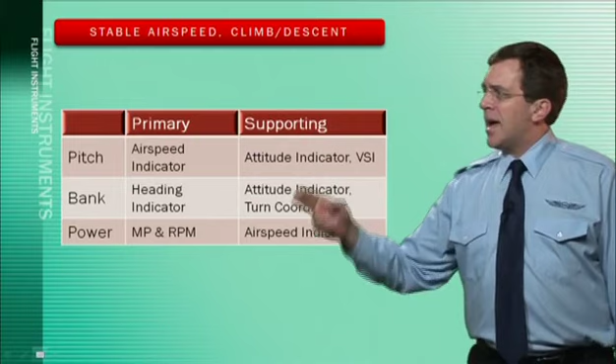Again, we have a summary of what we just took a look at: stable airspeed, climb and descent, primary and supporting. Primary for pitch is airspeed indicator. Supporting for pitch is attitude indicator and VSI. Primary for bank is our heading indicator. Supporting for bank is our attitude indicator and turn coordinator. Primary for power is manifold pressure and RPM, and supporting for power is our airspeed indicator.

Now we've got another scenario where we're taking a look at entering constant rate climb and descent for pitch instruments. Primary is going to come from our airspeed indicator, and supporting is going to come from our attitude indicator, also from our vertical speed indicator.

In this section, we're going to take a look at entering constant rate climb and descent for bank instruments. Our primary has to come from our heading indicator, and support has to come from our attitude indicator and from our turn coordinator.

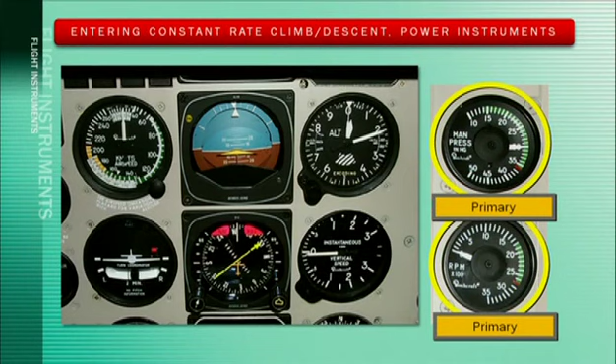Now we're taking a look at entering constant rate climb, descent for power instruments. Our primary is going to be manifold pressure and our RPM, and our supporting information is going to come from airspeed indications.

Let's take a look at our summary for entering constant rate climbs and descents. Our primary information for pitch comes from our airspeed indicator, and our supporting information comes from our attitude indicator and VSI. Our primary bank information comes from our heading indicator, and our supporting bank information comes from our attitude indicator and turn coordinator. Our primary power information comes from manifold pressure and RPM, and our supporting power information comes from our airspeed indicator.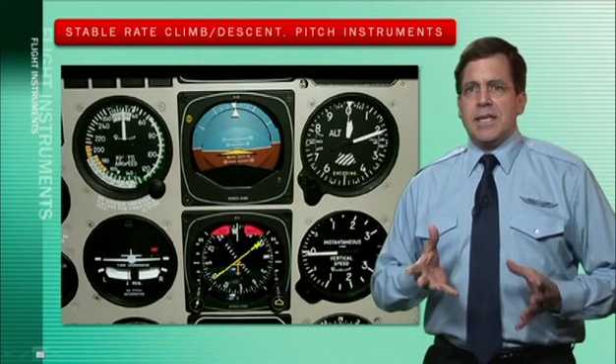In this scenario, we're taking a look at stable rate climb and descent pitch instruments. Our primary information comes from our vertical speed instrument, and our supporting information comes from our attitude indicator.

In stable rate climb and descent bank instruments, primary information comes from our heading indicator, and our supporting information comes from our attitude indicator, also from our turn coordinator.

In stable rate climb and descent power instruments, the primary information comes from our airspeed indicator, and our supporting information comes from manifold pressure and from our RPM.

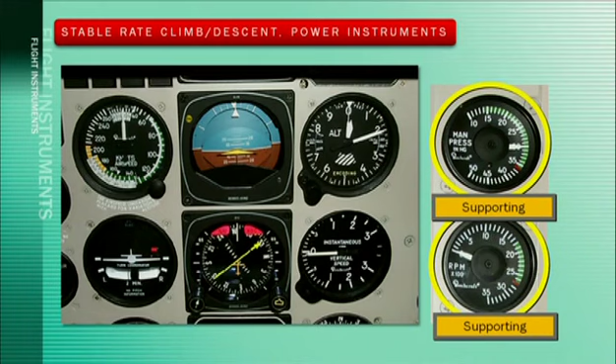In this summary for stable rate climb and descent, primary for pitch is VSI, supporting for pitch is attitude indicator. Primary for bank is the heading indicator, and supporting for bank is attitude indicator and turn coordinator. Primary for power is our airspeed indicator, and supporting for power is manifold pressure and RPM.

Now in this scenario, we have transition to standard rate turn pitch instruments. Our primary information comes from our altimeter, and our supporting information comes from our attitude indicator and also from our vertical speed indicator.

In our next scenario, transition to standard rate turn bank instruments, primary information comes from our attitude indicator, and supporting information comes from our turn coordinator.

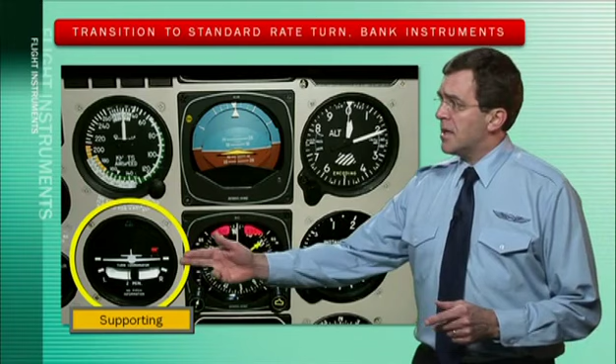Transition to standard rate turn power instruments: our primary information comes from our airspeed indicator, and our supporting information comes from manifold pressure and RPM.

Again, we have another summary. In transitioning to standard rate turn, primary information for pitch is from the altimeter, supporting information for pitch is from attitude indicator and VSI. Primary information for bank comes from our attitude indicator, and supporting information for bank comes from our turn coordinator. Primary information for power comes from our airspeed indicator, and supporting information for power comes from our manifold pressure and RPM.

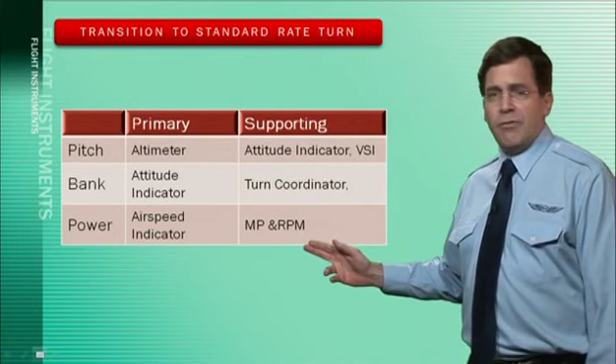In this scenario, we're talking about maintaining level standard rate turns. Pitch instruments: primary information from the altimeter, and secondary or supporting information from the attitude indicator and from the vertical speed indicator.

In the next component, maintain level standard rate turn bank instruments: primary information comes from our turn coordinator, and supporting information comes from our attitude indicator. And now we'll take a look at power, maintain level standard rate turn power instruments. The primary information comes from our airspeed, and our supporting information comes from manifold pressure and from RPM.

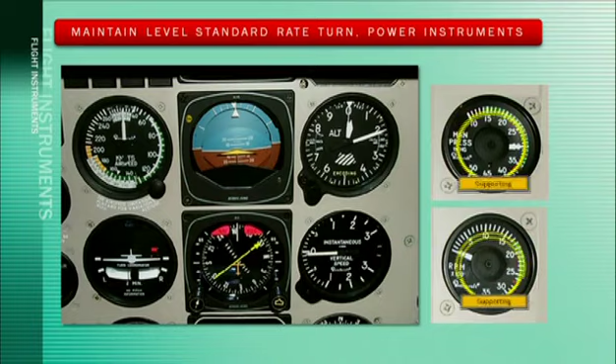In the summary for this section, maintaining level standard rate turn, primary information for pitch comes from the altimeter, and supporting information for pitch comes from the attitude indicator and VSI. Primary bank information comes from the turn coordinator, and supporting bank information comes from the attitude indicator. Primary information for power comes from your airspeed indicator, and supporting information for power comes from manifold pressure and RPM.

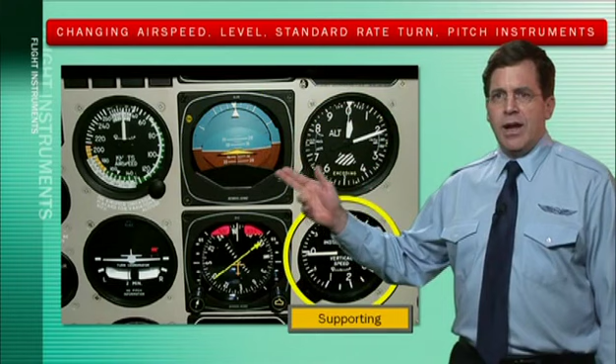In another scenario, we're going to take a look at changing airspeed, level, standard rate turn, our pitch instruments first. Primary information comes from our altimeter, and supporting information comes from our attitude indicator and from our vertical speed indicator.

Changing airspeed, level, standard rate turn bank instruments: primary information comes from our turn coordinator, and supporting information comes from our attitude indicator. Now we're going to take a look at changing airspeed, level, standard rate turn power instruments. Primary information comes from manifold pressure and from RPM, and supporting information comes from our airspeed indicator.

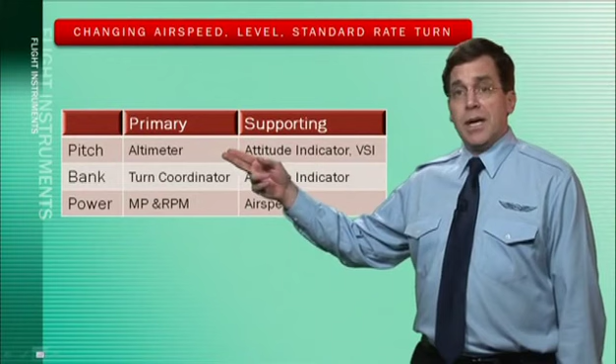In this summary section, changing airspeed, level, and standard rate turns, primary information for pitch comes from the altimeter. Supporting information for pitch comes from the attitude indicator and from the VSI. Primary bank information comes from the turn coordinator, and supporting bank information comes from the attitude indicator. Primary power comes from manifold pressure and RPM, and supporting power comes from airspeed.

In this scenario, climbing standard rate turn pitch instruments, our primary information comes from our airspeed indicator, and our supporting information comes from our attitude indicator, also from our vertical speed indicator.

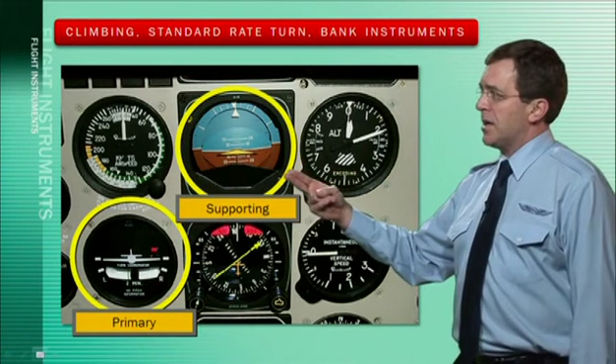Climbing standard rate turns bank instruments: primary information comes from our turn coordinator, and our supporting information comes from our attitude indicator. Then climbing standard rate turn power instruments: the primary information comes from manifold pressure and from RPM, and our supporting information comes from our airspeed indicator.

For this summary, we're taking a look at climbing standard rate turn. Our primary pitch information comes from airspeed, and our supporting pitch information comes from attitude indicator and the VSI. Primary bank information must come from the turn coordinator, and supporting bank information must come from the attitude indicator. Primary power must come from the manifold pressure and RPM, and supporting power must come from the airspeed.

Okay, that's a lot of scenarios. Now, when considering primary and supporting, ask yourself which factors apply, which will be primary or supporting instruments. Is this a steady state or a transitioning phase? Consider each attitude, i.e. pitch. Which instruments provide pitch information?

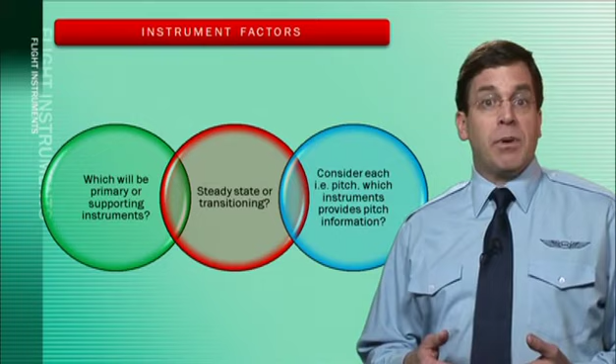Okay, let's take time for another review question. This one: the gyroscopic heading indicator is inoperative. What is the primary bank instrument in unaccelerated straight and level flight? Which of these is correct?

Your answer is A, magnetic compass. The heading indicator provides the most pertinent banking information in unaccelerated straight and level flight, since banking means turning and it is primary for bank. With gyroscopic heading indicator failure, the magnetic compass becomes the only heading indicator. All right, let's move along.

And our final topic in this lesson, unusual attitudes. Let's get back with your instructor in the classroom for that one.

When recovering from an unusual attitude without the aid of the attitude indicator, approximate level pitch attitude is reached when the airspeed indicator and altimeter stop moving and the vertical speed indicator reverses its trend.

We'll begin with this scenario. Now, here are the attitude indications for nose high and climbing conditions and nose low and diving conditions.

The following procedure is used to recover from a nose low attitude. Number 1, reduce power. Number 2, level the wings. And number 3, raise the nose to the horizon in level attitude.

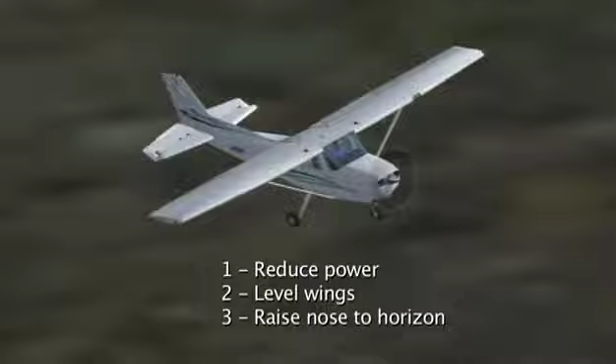The following procedure is used to recover from a nose high attitude. Number 1, add power. Number 2, apply forward elevator pressure. And number 3, level the wings.

Finally, here is an attitude indicator displaying level flight. The altimeter rate has slowed. The airspeed change has slowed, and the VSI direction is reversed.

Okay, let's take a look at 2 final review questions for our final topic in this lesson. We're going to ask you to refer to a figure in just a moment, but our question is, what is the flight attitude? A given here is that one instrument on this figure has malfunctioned. What is the flight attitude, A, B, or C?

Well, the attitude indicator has failed. Going back to our question to determine the answer, what is the flight attitude? A climbing turn to the right. You're in a right climbing turn, thus we showed that the attitude indicator has failed.

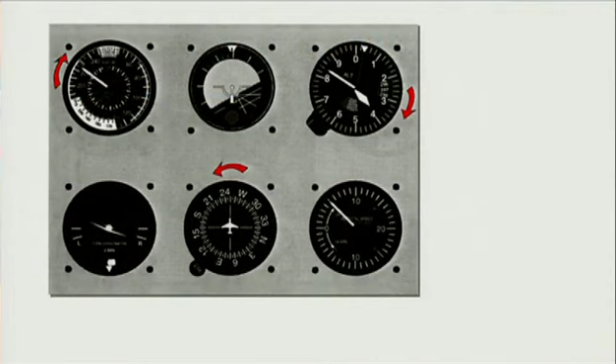Here we have it. Now our attitude indicator shows a right turn. Our altimeter agrees with the attitude indicator. The rate of climb agrees with the altimeter. Heading shows right turn. Our turn coordinator shows right turn, which means pitot-static system has failed.

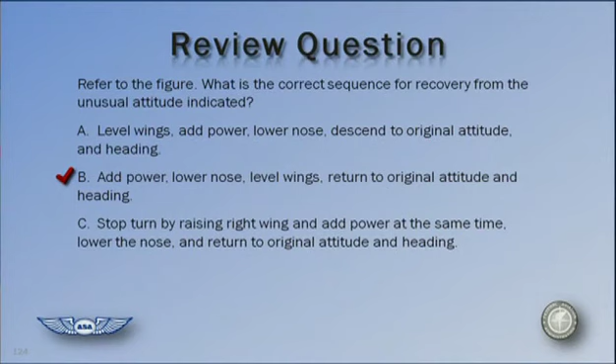Too little airspeed there. In order to correct that, what do we do? We 1, add power, 2, lower the nose, and 3, level the wings. So if we go back to our original question to ascertain the answer, well, it's B: add power, lower nose, level wings, return to the original attitude and heading.

Well, there you have it for lesson number 3.

Next up, what kind of backup instrumentation do technically advanced aircraft use should the screens go black? Well, these technically advanced airplanes typically offer 3 conventional style gauges: an airspeed indicator, an attitude indicator, and an altimeter. The one thing I'd recommend to any pilot is get lots of regular practice using these things.

Everyone thinks, well, these new systems are practically fail-safe and they only fail in 1 in 10,000 cases, but the thing you have to keep in the back of your mind is what if on some occasion you were today's lucky winner. So get lots of practice using everything in the cockpit.

Very good. Now, with no physical moving parts or electrical circuits to follow, how should a pilot go about getting familiar with the systems that are associated with cockpit automation like GPS? Well, I see 2 challenges here. One is mastering what I call the knobology, just learning what button pushes and dials are required to use the thing.

And that's something that just takes a little bit of practice. After a few hours, your fingers know the way around the cockpit. The second and possibly more important one is learning to understand what the systems are doing. You don't ever want to be in a case where you're just simply pushing buttons and the only thing you understand about what's happening is that the computer will take care of it. That's a bad place to be. To me, this is the difference between being a pilot and a passenger.